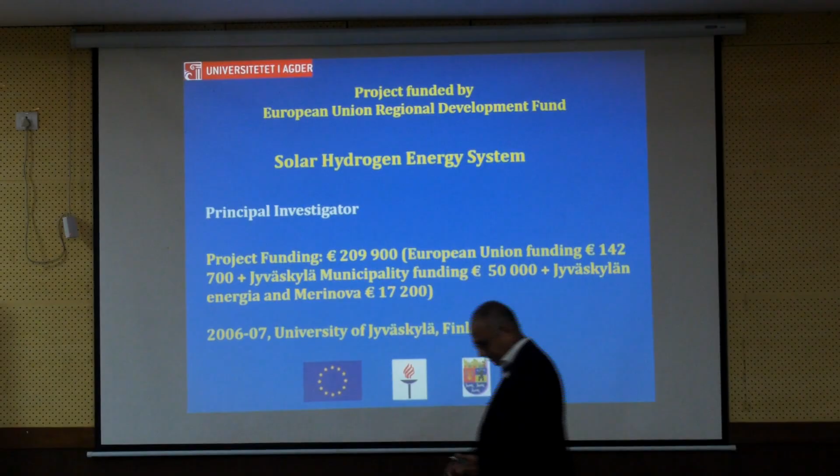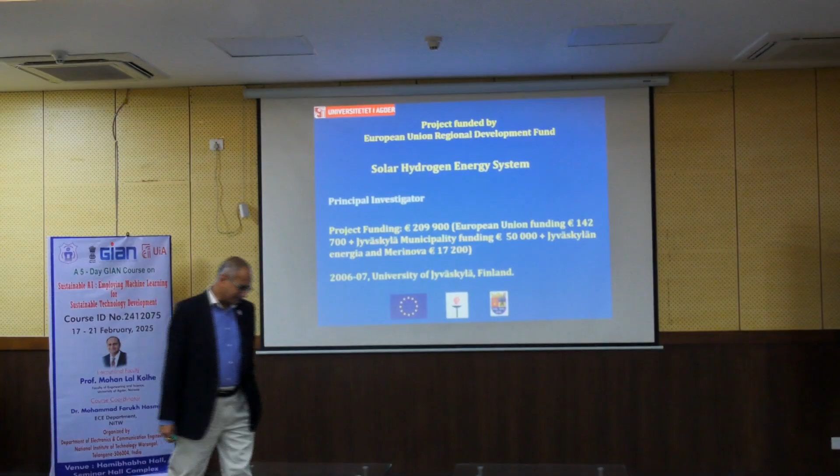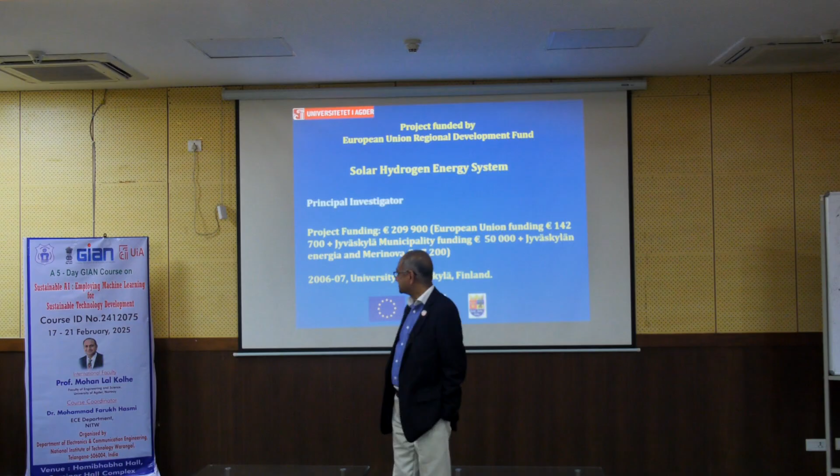We will start with the sustainable energy technologies, and the objective of this course is to utilize the expertise and knowledge I can share with you with reference to sustainable energy systems, and then how we have to utilize machine learning in managing, implementing, and controlling sustainable energy technologies.

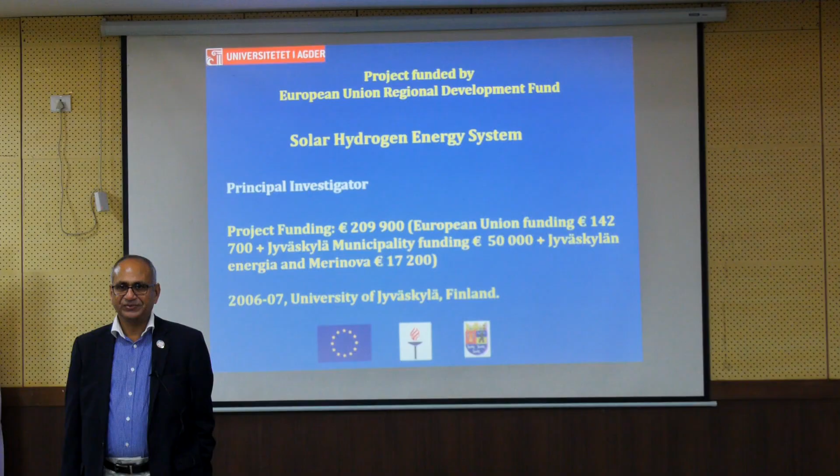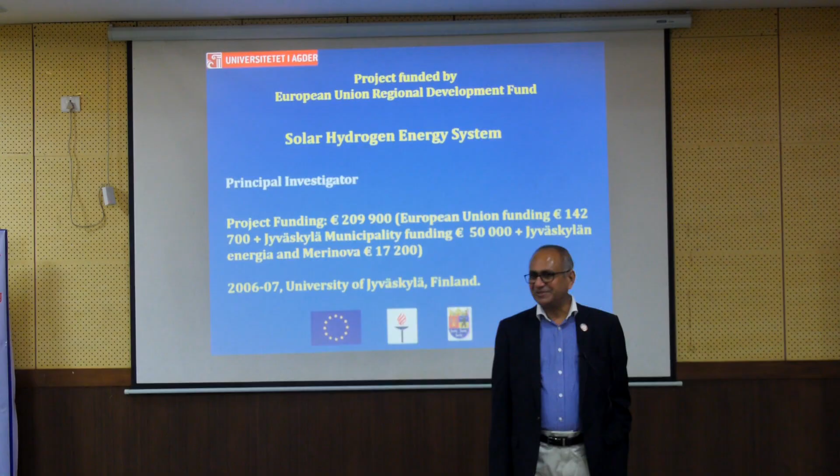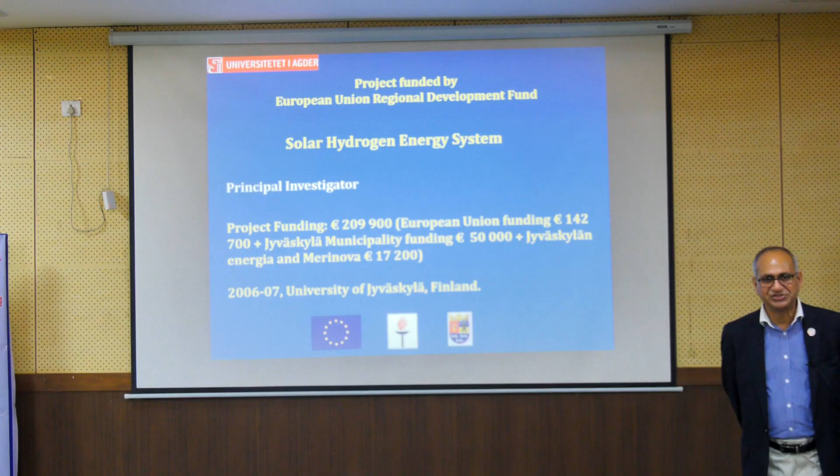Yesterday morning, I tried to give you one example of one of my projects. That project was very interesting, and I believe you might have enjoyed the description, because it is going to be very useful especially taking into account our rural Indian conditions, since many people living below economic level do not have proper access to energy and live in remote off-grid areas, and it is our duty to help them get back to the normal way.

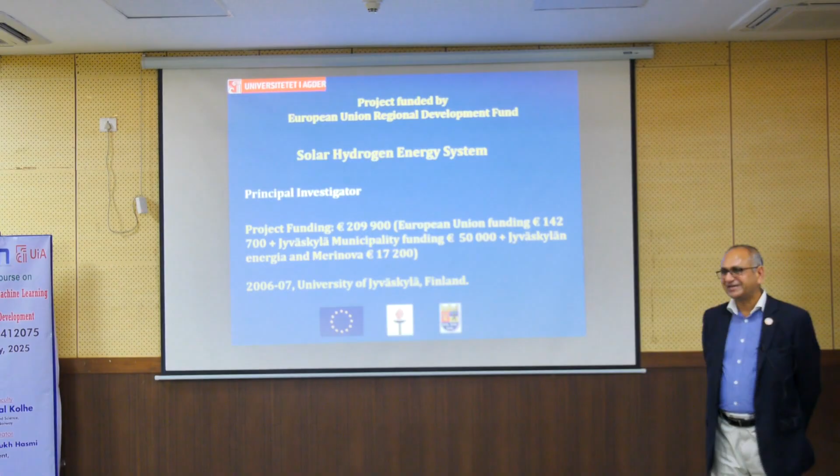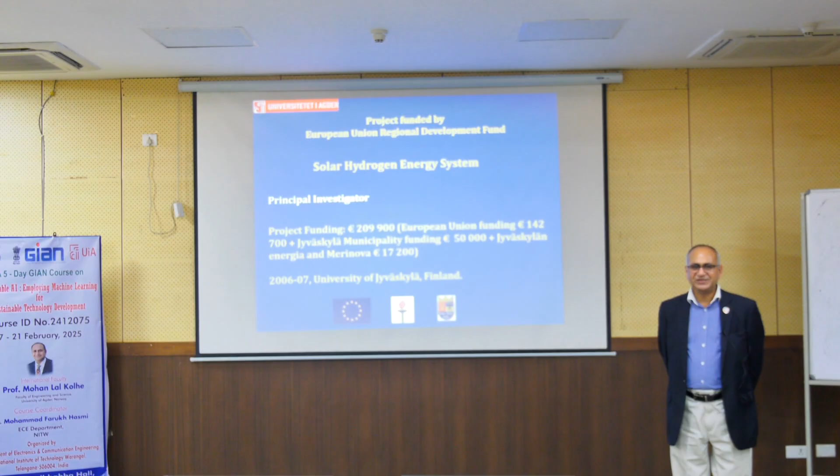And for that we have seen through yesterday's project how sustainable energy technologies can help them have energy access. So it means that project is going to contribute effectively to sustainable development goal 7, clean energy access for all.

So today we will move forward, and today we will focus more on integration of renewable energy systems for hydrogen production. This is a very hot topic at this moment around the world, and the Indian government has also agreed that they want to be the leader in green hydrogen production.

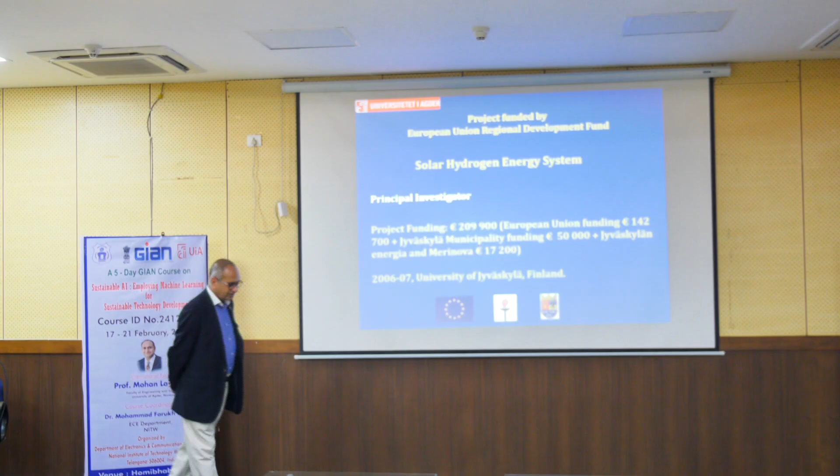You might have observed through media and technical news that all leading industrialists are trying to use green hydrogen as an energy carrier and to export green hydrogen in the form of green ammonia around the world. So this is a very interesting topic.

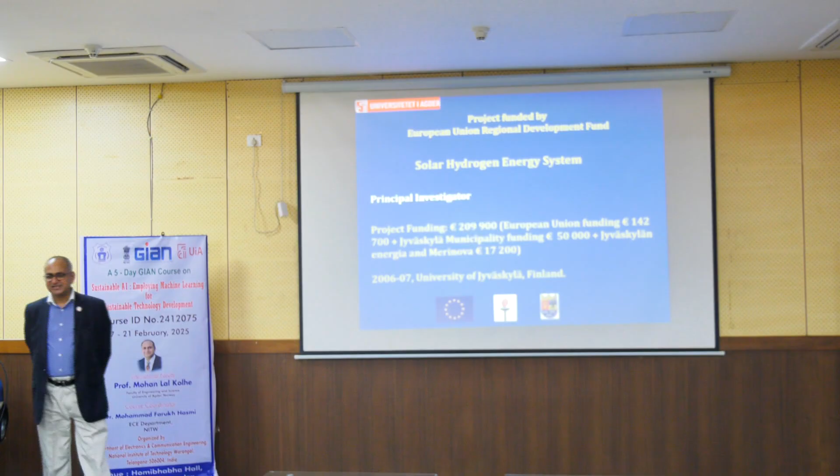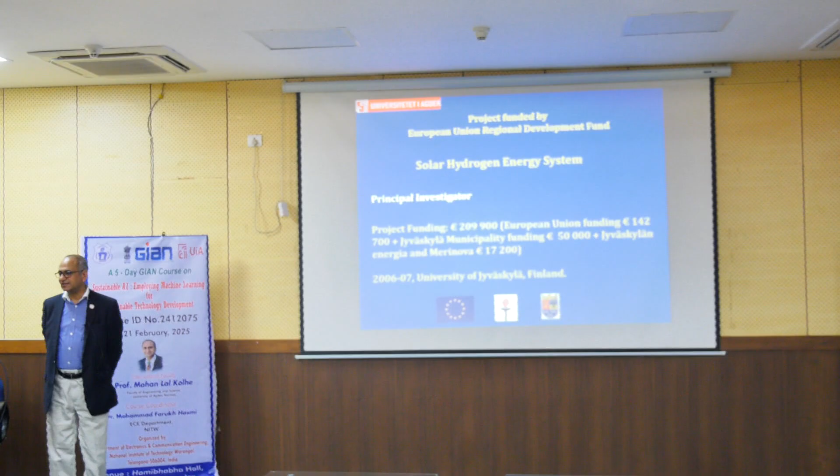First I will share with you a small example of one of the projects which I did in 2006 and 2007 while working at the University of Jyväskylä, Finland. Yesterday I was mentioning that I was working as a research director there, and my responsibility was to develop a master's program in renewable energy with three components: education, research and demonstration.

Education, we all know that we need to develop courses and teach the young generation. Research also, we have to work with upcoming technology, but the key component of that project was demonstration.

It means that we have to integrate the local community through this research demonstration project, so that we can get society integration in that.

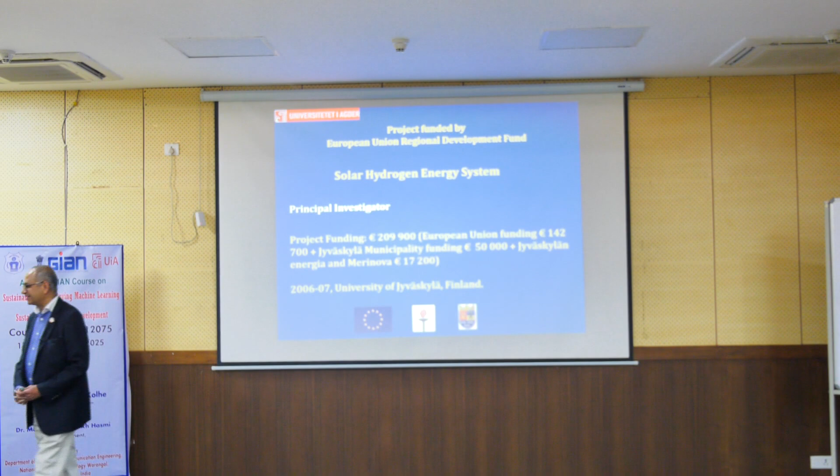With reference to that, you can see that in early 2006 and 2007, I worked on this solar hydrogen energy system. So how does this solar hydrogen energy system work? This is a very interesting topic.

We know that yesterday also we discussed this, and when I discuss all these things, we will see how we can use machine learning for the controlling of such a system.

Yesterday we have seen that whenever we have an off-grid system or any renewable energy system which has intermittent renewable energy sources - for example solar photovoltaic, wind turbine, etc. - they are going to be connected within the distributed energy network or within a small power system network, sometimes called a microgrid.

So to overcome the intermittency of these renewable energy sources, in yesterday's lecture we discussed that we need to have appropriate energy storage. We know that a battery bank can play the major role for energy storage, but short term energy storage using a battery bank is quite okay - if we want long term energy storage, then we need to utilize hydrogen as an energy carrier.

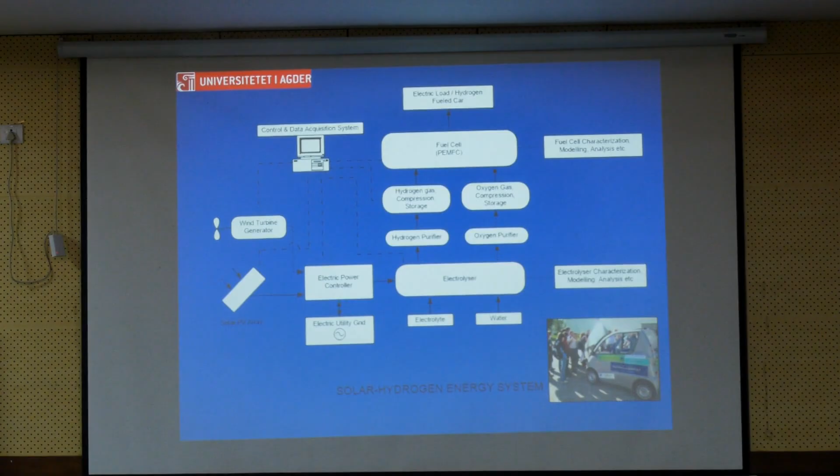So in this project the idea was that when we have intermittent renewable energy sources, to overcome the intermittency of these renewable energy sources, we need to find out appropriate energy storage. To get this appropriate energy storage, either we can use the battery bank or we can use hydrogen as an energy carrier also.

So, if suppose we are going to utilize hydrogen as an energy carrier, then how such system need to develop.

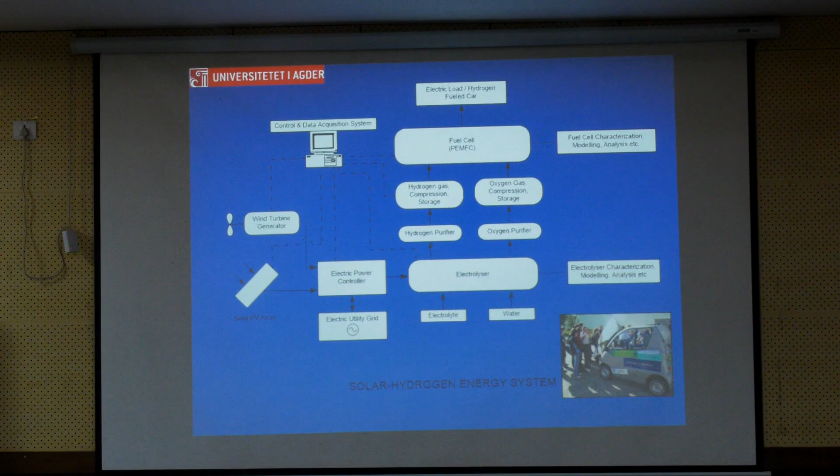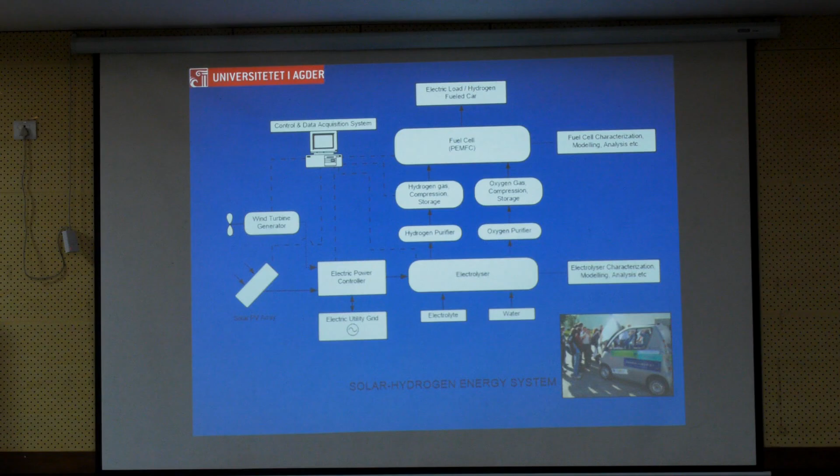So now, if we have renewable energy sources, meaning sustainable energy sources, these sustainable energy sources' output is going to be intermittent power versus time. So this intermittency we need to overcome. To overcome this intermittency, we need energy storage.

And when we want to have this energy storage, either we can use the battery bank or we can use hydrogen as an energy carrier also. Both energy storage methods are based on electrochemical energy conversion.

Now, when we have to store the energy, so when we are getting the intermittent renewable energy, in this case it is the wind turbine and the solar photovoltaic system. So this output, which is intermittent in nature, and sometimes this system is going to be grid connected also.

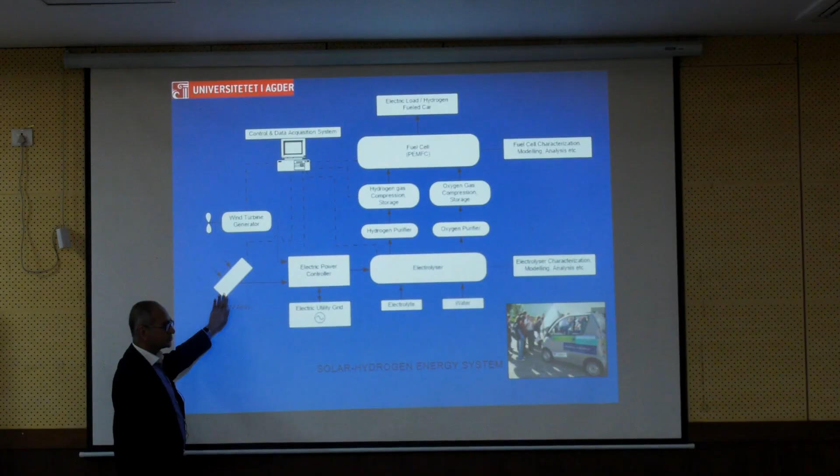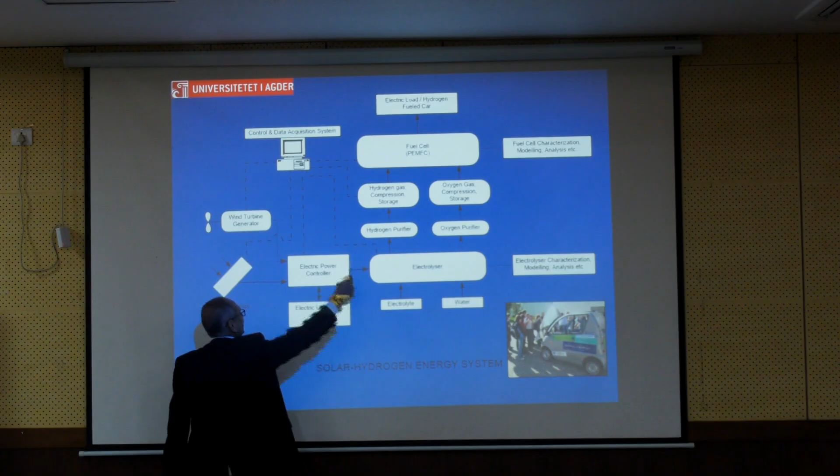So, to overcome the intermittency of these sources with the objective of storing the energy in the form of electrolytic hydrogen, we need to have appropriate power conditioning devices here. I believe most of you are from the electronics background, am I right?

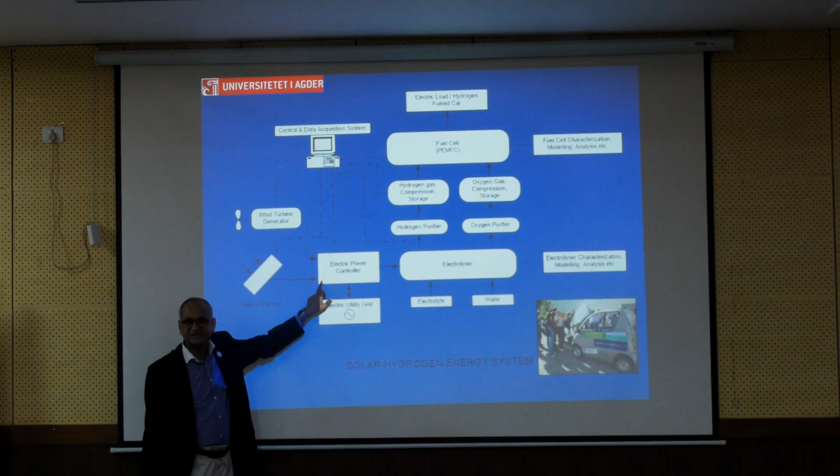Right, so you know how we can develop the power conditioning devices to integrate the wind turbine or the solar photovoltaic system together. If we consider the solar photovoltaic system here, this power conditioning device is going to have the capability to extract the power at the maximum power point. I believe you might have already studied the maximum power point tracking of solar photovoltaic panels, and for that we need to develop the DC-DC converter.

So here you can see that within the renewable energy sources, when we have the solar photovoltaic system, we know that the output from this system depends on incident solar radiation under different conditions. So our objective is to operate the photovoltaic at this point, that is the maximum power point tracking mechanism.

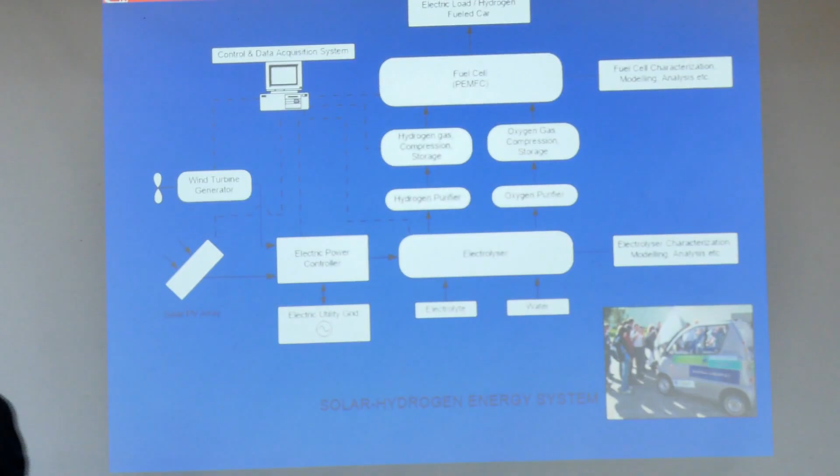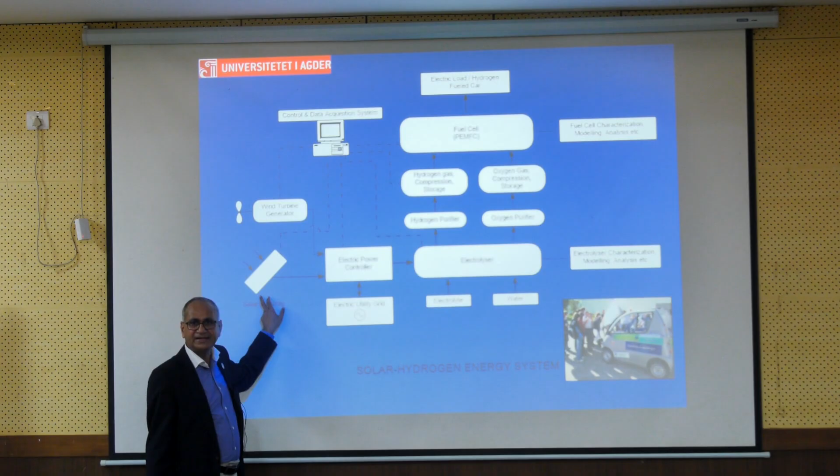So here I can say it is an MPPT mechanism which is going to be based on a DC-DC converter. This DC-DC converter, which is required to integrate this solar photovoltaic system, is going to be very important. So here you can see, when we talk about sustainable energy technologies, how you can utilize your electronics background in developing a specific component required to integrate the solar photovoltaic system using a DC-DC converter to operate at the maximum power point.

So here we have that point - you can see how you can utilize your technical knowledge about that. Similarly, for the wind turbine also, we know we need to connect it under the renewable energy sources. So this wind turbine again depends on which type of generator we are using there.

So in small capacity conditions, if we are not talking about very high capacity conditions, this may be a 3-phase permanent magnet synchronous generator. Those who have some electrical engineering background or might have done some course on electrical machines may be aware of that.

Now, when we are talking about the wind turbine 3-phase permanent magnet synchronous generator, how will the output be? The output will be variable voltage, variable frequency. This variable voltage, variable frequency we cannot feed into the system, because it is not at a proper reference level.

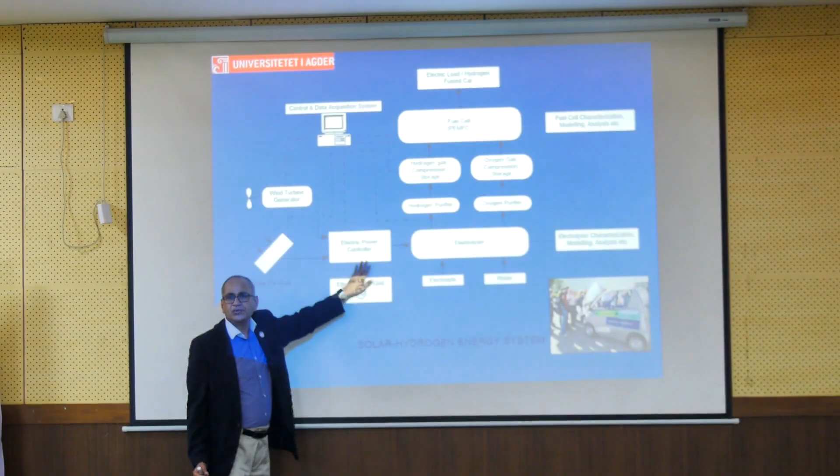To operate this wind turbine at the maximum power point, considering wind power characteristics, we need appropriate knowledge on developing power conditioning devices which can help us operate this wind turbine at the maximum power point. It means that by utilizing the electronics background, we can operate the solar photovoltaic and the wind turbine by using appropriate power conditioning devices and controlling them to extract the maximum power from these sources.

I will go into detail after some time. Our objective is to store the energy in the form of electrolytic hydrogen, because we want to integrate all sustainable energy technologies together. That is the objective of our course also, and that is why the Government of India funding agency approved this course.

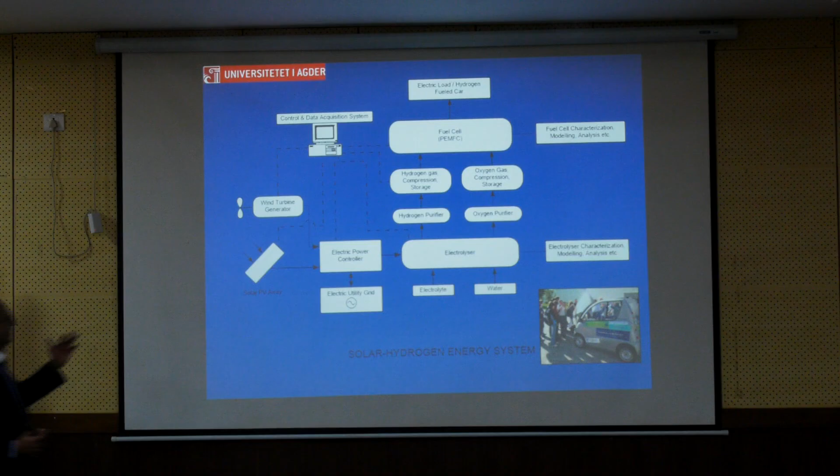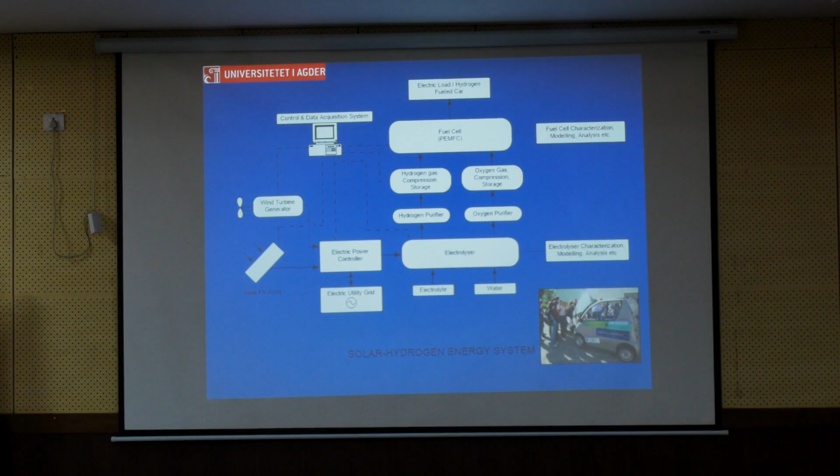So, after integrating these renewable energy sources to operate them at the maximum power point using appropriate power conditioning devices: one device is for the solar photovoltaic system, the DC-DC converter, to operate at the maximum power point. Second is for the wind turbine. Here we have taken a 3-phase permanent magnet synchronous generator with variable voltage, variable frequency output, which we cannot feed directly, so for that we need to convert this AC to DC.

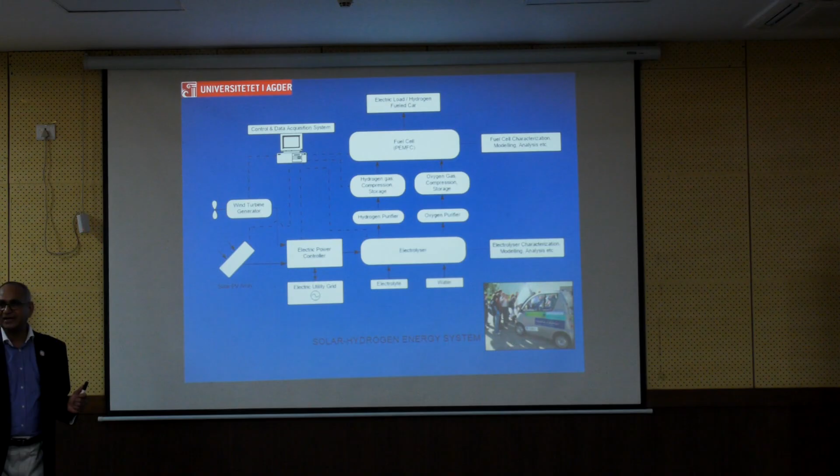Then, when we have the DC output from the photovoltaic as well as from the wind turbine, that DC output is very important because we have to convert that excess energy into electrolytic hydrogen. Most of you might have studied the electrolysis process in your engineering chemistry course. For electrolysis, we need to provide DC supply. That is why I did not mention the AC thing, only the DC output from both sources. So that DC output is provided to the electrolyzer.

When we provide that DC output to the electrolyzer, there are different types of electrolyzers available in the market: for example, alkaline electrolyzer, PEM electrolyzer, anion exchange membrane electrolyzer, and solid oxide electrolyzer. Out of these, the alkaline electrolyzer is a well established technology which has been used continuously for maybe the last century.

So, we are in constant need of hydrogen, and there is going to be a big requirement of hydrogen also. So, how is this going to happen, and why do we need hydrogen from green or clean energy sources?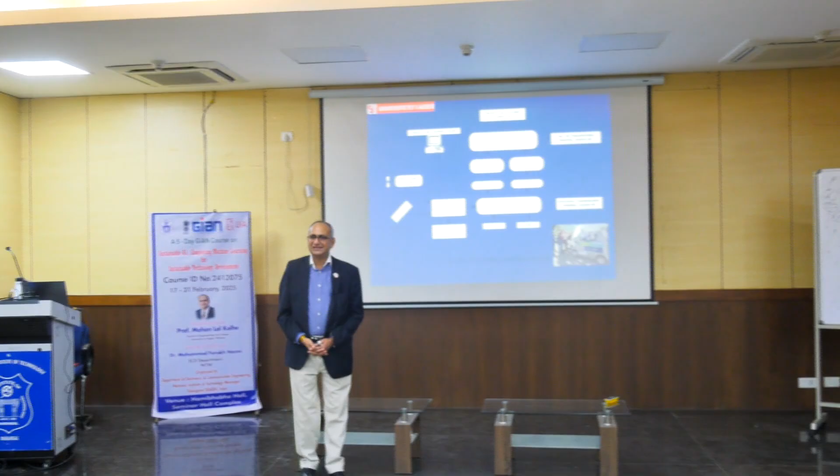Anyone can tell about this? Because we are talking about sustainability within the system, and we want to reduce greenhouse gas emissions. Many developed countries have signed agreements to be carbon neutral by 2050. India has also signed an agreement to be carbon neutral by 2070. To become carbon neutral, we have to reduce our dependency on hydrocarbons.

At this moment, the hydrogen required for many applications is coming from natural gas reforming. Around or more than 95% of hydrogen is coming from natural gas reforming. So, when we do natural gas reforming, CO2 is emitted, so it is not carbon neutral.

And now, we have seen recently, due to the Russia-Ukraine war, there are a lot of geopolitical conflicts, especially with the natural gas supply. So, to avoid these geopolitical conflicts and to reduce carbon emissions, in place of hydrocarbon, we can use green hydrogen.

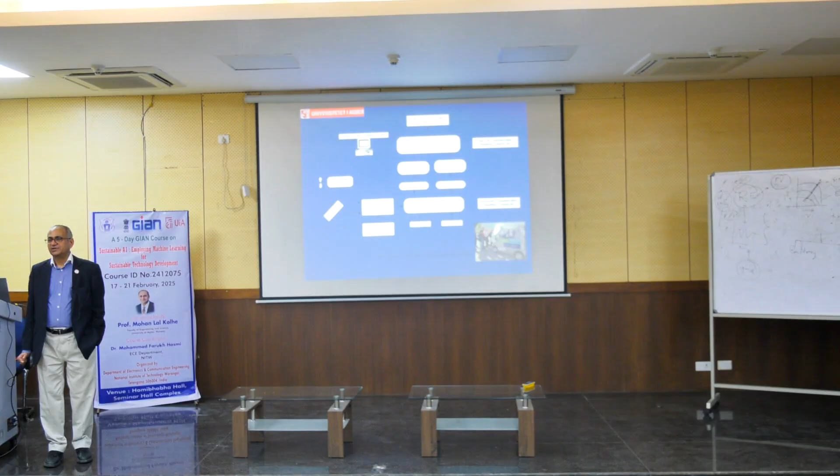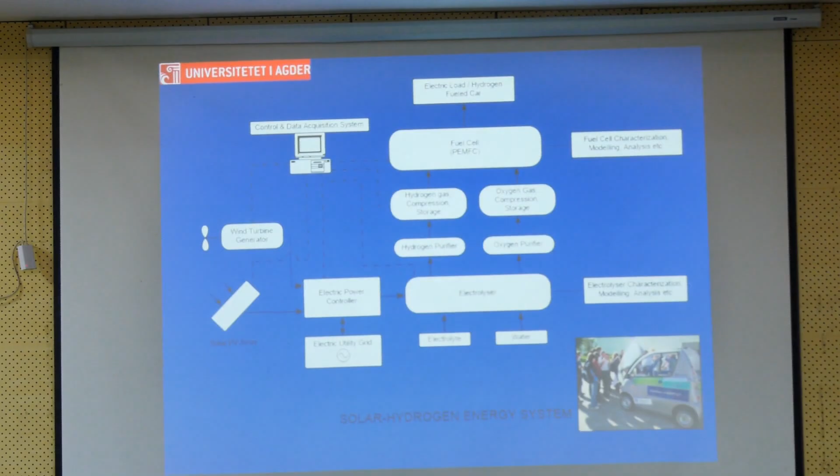So, the learning from this project is going to be very useful for understanding how green hydrogen can be produced using renewable energy sources. I did this project in the early 2000s, which was funded by the European Union Regional Development Fund in cooperation with regional industry in Finland.

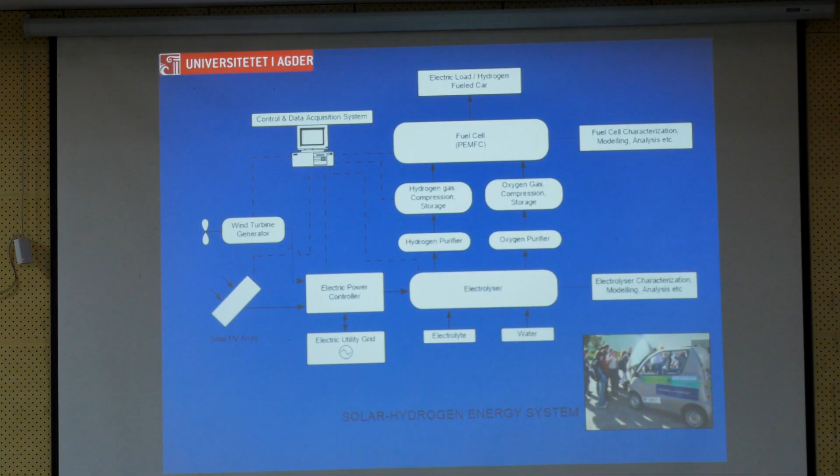So, here when we are talking about this electrolyzer for producing green hydrogen, we need to provide DC supply. This DC supply from the wind turbine and solar photovoltaic system, how we can get it, you can easily understand. But considering the power electronics, the electronic components and the control system, we may need to control these power conditioning devices from the wind turbine as well as the solar photovoltaic system continuously using PWM switching signals.

When we use PWM switching signals for controlling this AC-DC converter and DC-DC converter, we may need to develop control algorithms based on the inputs from the wind turbine and the solar photovoltaic. It means we should have appropriate information about the incident wind speed on the wind turbine, as well as information related to the solar radiation incident on the solar photovoltaic panels.

So, now when we provide this DC power to the electrolyzer, let us say in this case it was an alkaline electrolyzer. An alkaline electrolyzer always needs a constant power supply; it cannot operate under intermittent power supply. That is why here, we may need to have another source to overcome the intermittency of this source.

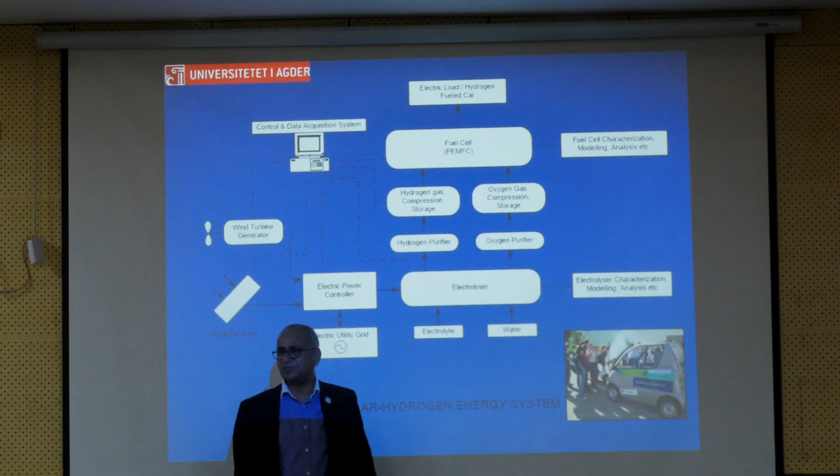You may be aware that there are different types of fuel cells available. But in this case, due to the purity of the hydrogen, the proton exchange membrane fuel cell, due to its lower capacity, can be a good candidate for stationary applications as well as small capacity automobile applications. Therefore, the stored energy in the form of electrolytic hydrogen has been utilized as fuel for this proton exchange membrane fuel cell.

Let us say this is a PEM fuel cell, and in this PEM fuel cell we are providing hydrogen as a fuel, which we got as green hydrogen. This PEM fuel cell is an electrochemical device. To complete the chemical process, we need an oxidant also. This oxidant can be air or oxygen, and then this proton exchange membrane fuel cell is going to produce DC electricity at a proper operating voltage, depending on how many cells are in the stack.

When we get this DC output from the proton exchange membrane fuel cell, it is at a voltage which we cannot feed directly to any system. If that system is a DC system, we may need a DC to DC converter. And if we have an AC load, then we need a DC to AC converter, and then we can fulfill this load. So, in this proton exchange membrane fuel cell, we utilize hydrogen as fuel and oxygen or air as the oxidant, and taking into account its operating condition, we produce DC, pass it through the DC-DC converter and then the DC to AC converter, and we can supply the electrical load.

So, here what I want to share with you is the experience of working on this sustainable energy project: how we can integrate different sustainable energy technologies for storing energy in the form of electrolytic hydrogen, or in short, hydrogen as an energy carrier, and for that how we need to have different power

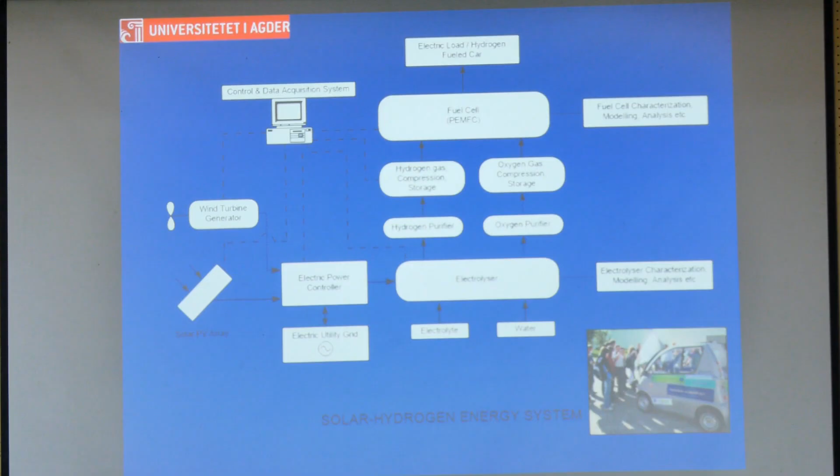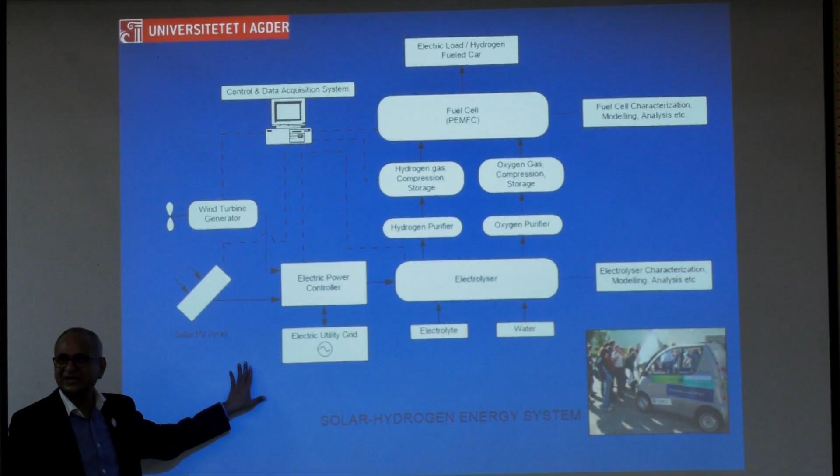conditioning devices integrated together. And when we get all these system components integrated together, we are going to collect all the data, and then I will explain how we can use machine learning techniques for managing or controlling the operation of such a system.

Is it okay? Do you have any doubt or any question? Just feel free to ask, okay?

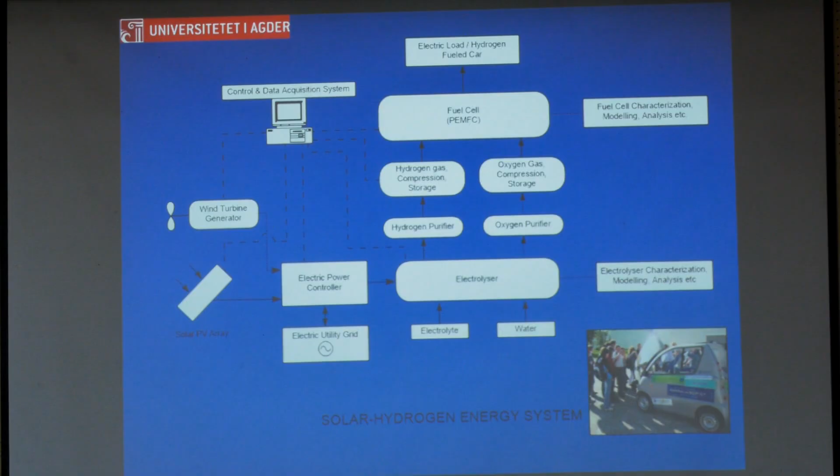So, here you can see when we are using the stored energy in the form of electrolytic hydrogen as a fuel to the proton exchange membrane fuel cell, we can supply it to the stationary load as well as to the car or automobile.

Now, when I was working at the University of Agder, Norway, in cooperation with the local technical college, which is basically like a polytechnic, they helped in developing a single passenger car. They built this car specially for this project, in which we are using hydrogen as a fuel. We worked on that in the early 2000s.

So, at one point we stored this hydrogen in compressed form, but at the second point we wanted to utilize that hydrogen as a fuel in this single passenger car. In the case of the single passenger car, we used a metal hydride hydrogen storage tank. In your basic engineering chemistry, you might have already studied metal hydride conversion systems for storing hydrogen.

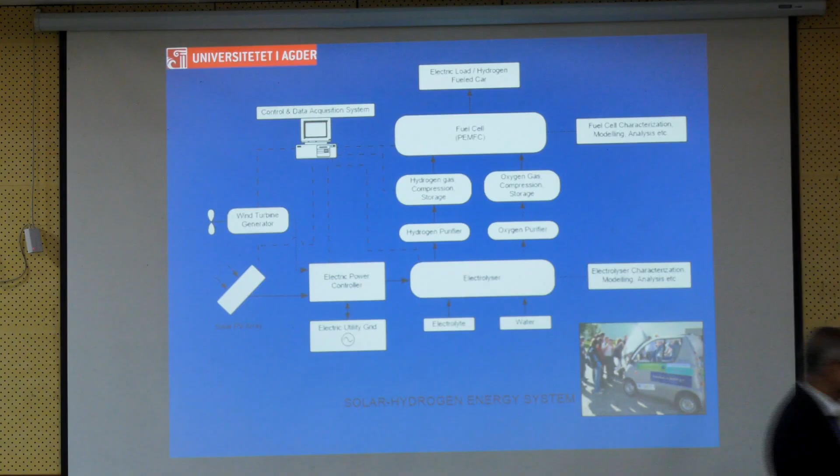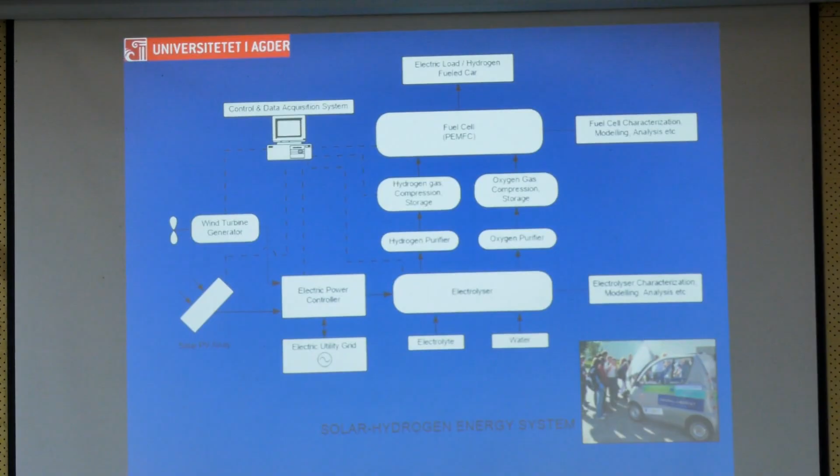And I think most of you are from an electronics background, from what I understood, correct? Am I right? So if you have to utilize your electronics background, how will you help me on that one? Our objective with this GIAN course is to improve our knowledge, okay? And for that we have to utilize your background, and all of you are at least postgraduate level.

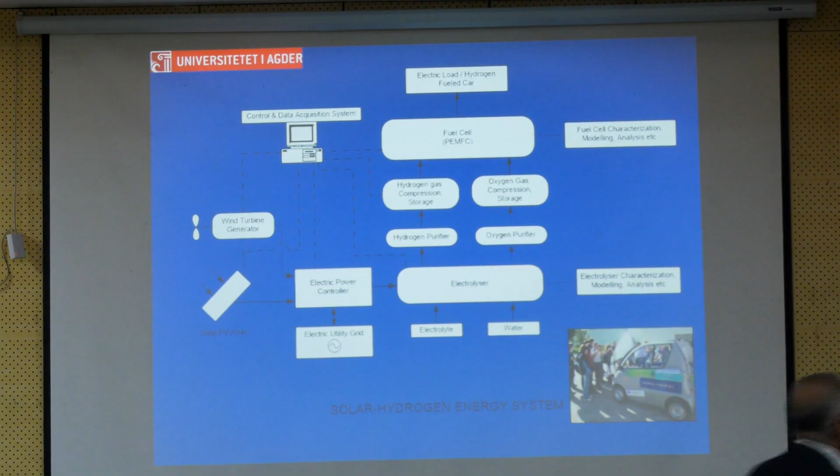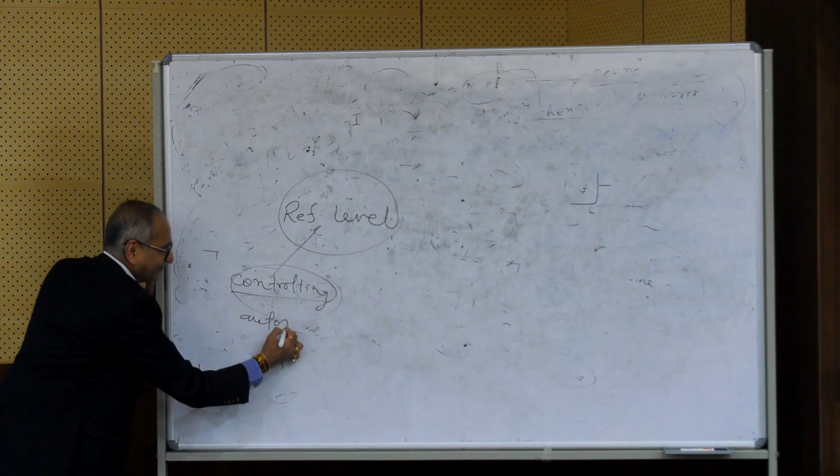So now you have to help me with how we will define a reference level and how we can use this reference level for controlling the autonomous operation of this system.

Okay. So now we will take a coffee break, and after the coffee break maybe you can do some brainstorming and come up with some solution for how to define the reference level for such a system, and for what purpose. For the autonomous control, and how we can get that autonomous control: using the data we are controlling here and making autonomous decisions with physics-based machine learning techniques. Okay, so let us have a coffee break now, and after the coffee break we will start again.